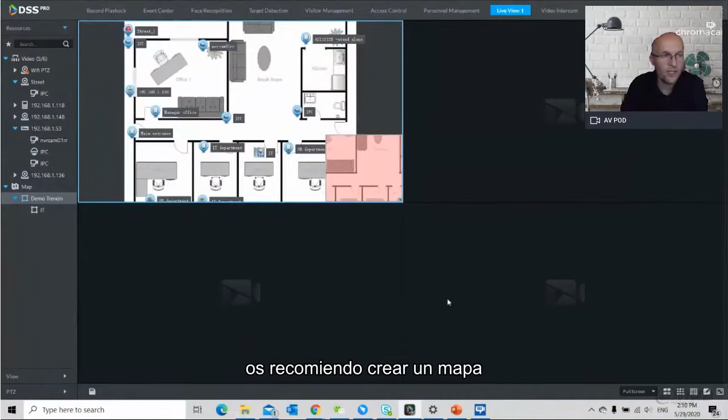So what we can do actually here, we can have maps on our live view. I really recommend creating a map for our partners, because this will really help a lot to the operators to see where the alarm is. In case one of the devices has an alarm, it starts being shown in red on the map, so for them it's really easy to localize where the problem is.

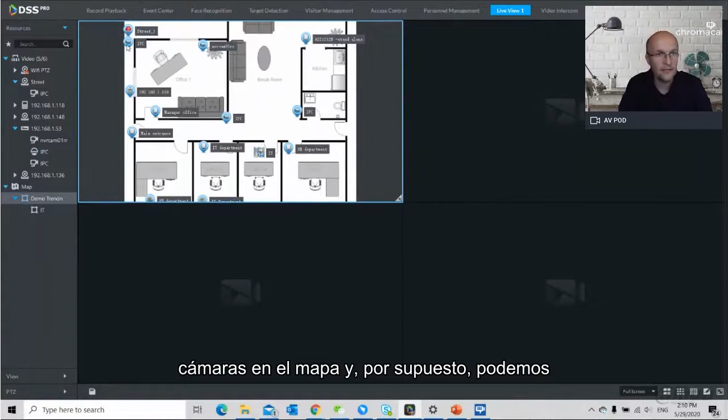Also, what we can place on the map - I was also asked today to do some comparison between our VMS and other VMSs on the market. We can place the cameras on the map, and of course we can have a live preview of the camera which is on the map. This is, for example, a street in Slovakia, in Trenčín. I live in the suburb - don't worry, we've got regular streets here.

What else can we place on the map? We can place the VTOs on the map, as you can see here. That's really nice because other vendors cannot do that - other vendors cannot put access control on the map. So I can open doors from the map, or I can lock them, or do any other things with the door. I can also place the VTH on the map, which is also really powerful.

So also the indoor units. And of course, we are offering cascading of the map. So in case we have a bigger project, we can place a map inside of the map, so kind of cascading over here.

You can click anytime inside of the map and see one camera, second camera. I didn't put the flooring for one room, but in real life, we would have also the floor plan over here.

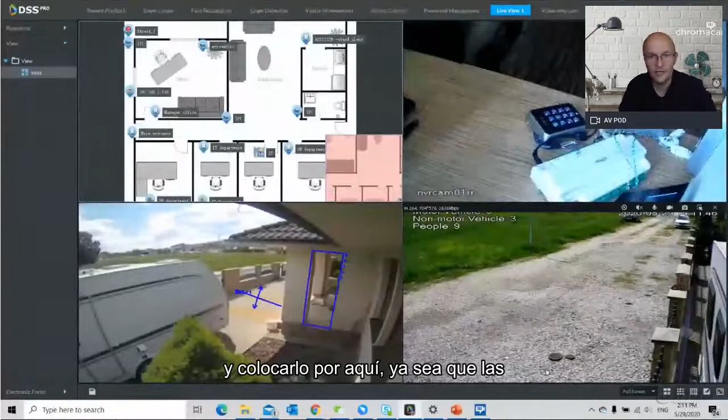In case the operator wants to work really fast, we offer saving the view. You can create any kind of view with your cameras and place it over here. Either the cameras are connected to NVR or connected somewhere else, it doesn't matter. You can do any combination, and also save the map on the view. So that's another advantage, that's the live view.

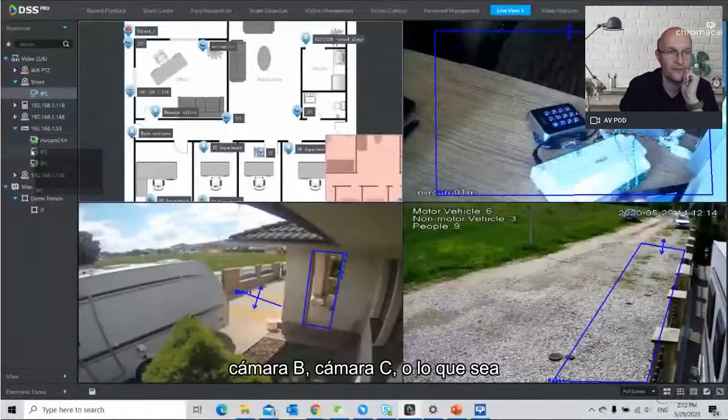In case the operators are new, I know how companies deal with cameras. If you come to a shopping center, you'll have first floor, camera A, camera B, camera C, or whatever letters. For a new operator, it's really complicated and hard to navigate. So what we add here as a new feature is a live preview.

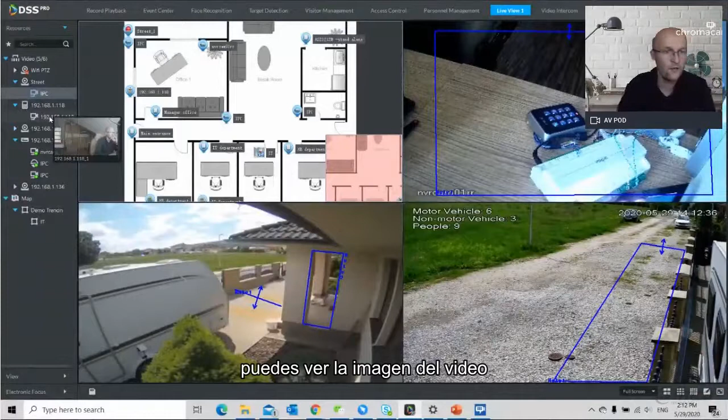As you can see, I'm going with the mouse over the camera, and I can see a live preview of that particular camera. I can also go over here on the VTO, and you can see the image from the VTO. So this is the new feature over here, really nice and very convenient for the operator.

What's also important for the operator is the alarms, the event center. So now I will pop up an alarm for you. Give me a second. I got one camera set up for a person without a mask, so I will create the alarm here.

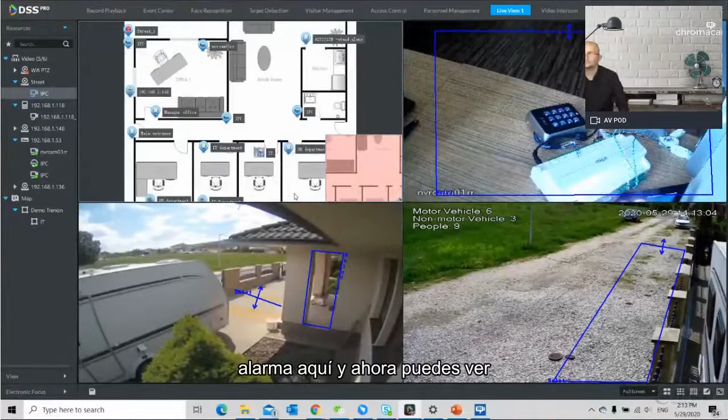Person type matches this trigger, and now you can see the alarm pop up. You can either go and do some investigation from this window, but what I recommend more is to use our event center, where we really made a lot of progress.

You can go to any of the alarms. They are nicely listed over here, by the time they arrived, with the alarm type name. For example, no mask alarm, and also some remark on what should be done, like ask the person to put the mask on. So you can give some instruction to the operator on what they should do.

Sometimes operators might not know what they should do. Now it's pretty clear, ask them to put the mask on. What else do I have in the event center? I got the live view over here, so we can go to the live view on the camera. Right now no one is standing, just me waving.

I can also see the snapshot from that event, when the person came without the mask into the office. I can go into recordings, so I can play the event. Okay, I see the man without the mask. And I can also go to the map.

That's why I really recommend asking our customer to please create the map. It will take them a few minutes, but for the operator this is really big help because they can quickly locate where the incident happened. Some other vendors don't have this at all, they have just snapshot and recording, not all these features.

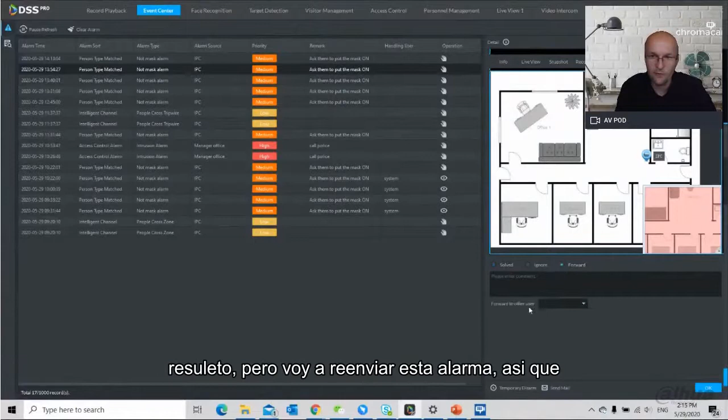Moreover, what I like is the escalation of the alarms. Let's say I got this alarm next to the kitchen, and next to the kitchen one of my colleagues is sitting. So I will not mark this as solved, but instead forward this alarm, saying please check on him, or whatever message you write over here. You can select the user from the drop-down menu and click OK.

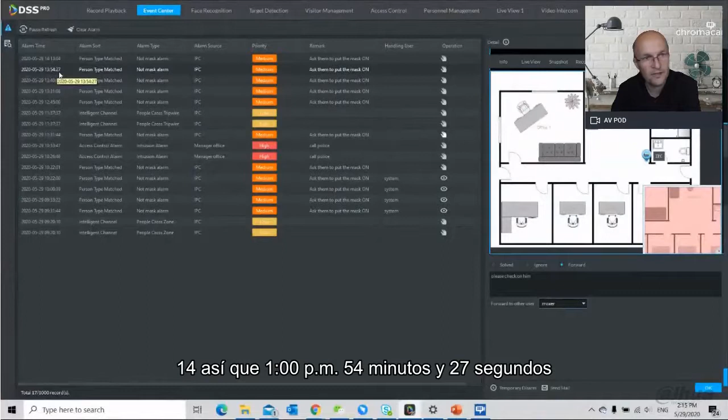Now you can see this alarm is at 1 p.m., 54 minutes and 27 seconds. This alarm will disappear from my list as operator. You see, this alarm is not here anymore, so for me this means it's solved, someone else has to handle this alarm.

If I just want to acknowledge the alarm, seeing there is a person without a mask in my office, I can do this right over here and hit acknowledge. You can see who was the handling user, it was system. So you can acknowledge the alarms over here. The alarms can have different priority colors, orange, yellow, and red.

So while creating the alarms, you can set up this priority. I also recommend this so the operator knows they need to solve these alarms as the first one.

Someone broke the door in the manager's office. What should I do? Call the police. So again, I know what to do.

In case the doors are broken, or someone just didn't close the door on purpose, and I'm getting those alarms, I can temporarily disarm. Let's say they are repairing the door, and I will ask them, okay, for how long will you repair the door? They will tell me 30 minutes. So I can just put 30 minutes and okay, and I will not get those alarms in the next 30 minutes. Everything directly from the operator view, and it's really nice and easy.

So really comparing to other platforms, that's something really, really nice.

Okay, I was talking about the live view and some live preview. Also in the playback, you can see on the bottom that wherever I go, I get the live preview from that time. So you see right now it's at night, right now it's at day. So I don't need to really click and move around the timeline in order to do some investigation. But also I can do some investigation.

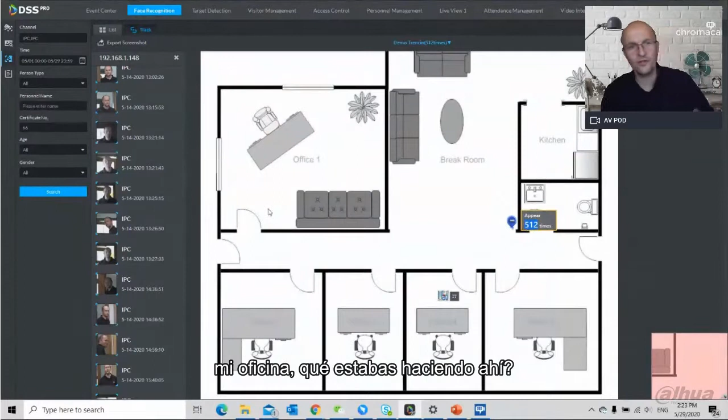You can go into the recording also from here. If you go all the way down, you can play the recording of how the person entered the office and so on. So it's not only about this — we've got pre-alarm time and so on, and everything I showed you before can be done also from this part.

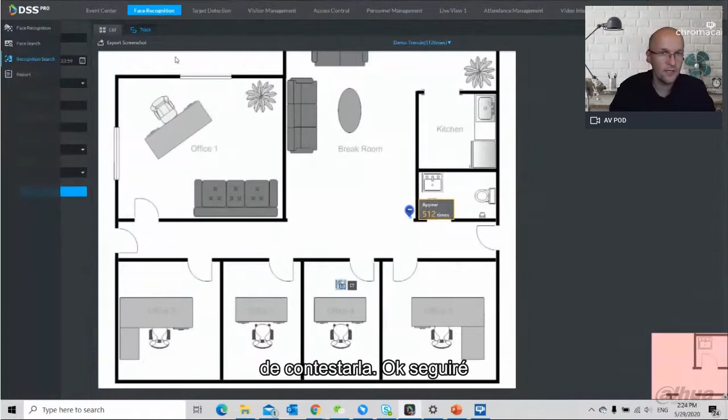Okay, I will continue with target detection. Everyone knows who is our main competitor, right? I don't like to call the names, but we all know. This is something they don't have — target detection. Our AI, our analytics are the best on the market. It was said also by IPVM, we are above average, together with one more vendor. So really, really, really nice.

So our analytics, what we can do, a lot. First of all, we can do special — you can see over here, a person is pixelated. I'm administrator, so what I can do is disable privacy masking.

That's what a lot of people were asking me for a long time. I'm an operator and I want to see, but my other operators shouldn't. If you have the 7000 series camera, you can enable and disable privacy masking if you are eligible, of course. So it's another feature where you can lock the project against the competitors. Moreover, for such target search, some other vendors require you to buy a license for 300 euros per camera, and you need AI cameras with the newest analytics and so on.

Over here, I can do much more for much less money. Enable, disable, really easy. You can also do this for export, so also in export you can enable or disable export with a privacy masking. On camera 7442, you need to enable privacy masking as a default.

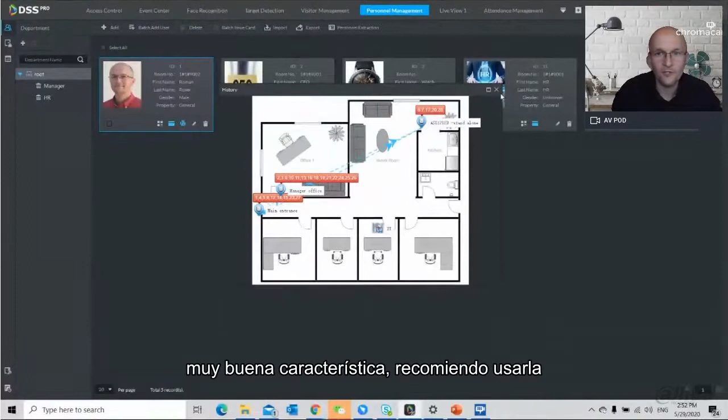You can put it on full screen to get a bigger overview. So the first time today I entered the main entrance, then I was going to the manager office, then again to the manager office, then to the main entrance, and then to the kitchen. So I drank a lot of coffee today, as I see. That's how you can see how the person was going around your building.

Also very nice, how you can do the import and export, it's actually the same thing. So I will do the export of the user again. Because of improving privacy in the latest generation, you need to input the username and password. I will put it over here. You can export with a picture - it will take a little bit longer and export in a zip file. If you choose without that, it will be in Excel file only. So I will put, I don't know, number 3, export done, open the Excel, and I can see all my users over here. If I choose with the face, I will have the name of the picture over here with .jpeg.

It's the same for importing. If you want to import users from some other system and you have their faces over there, you can import them. Over here, just put rr.jpeg. Make sure that they are located in the same folder as the XLS file, and just import them into DSS Pro. Make sure that the picture is not bigger than 75 kilobytes - it's written here in the requirements. Okay, so that's about importing and exporting users. Nothing really to talk about, it's really easy.

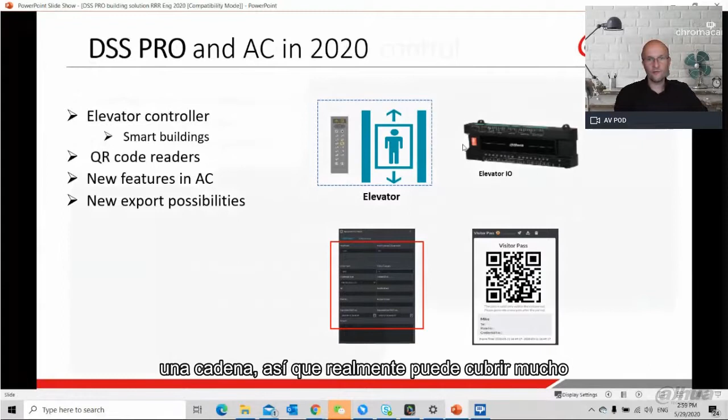Attendance control over here - it's part of DSS Pro again, it cannot be in DSS Express, it's an additional module. In DSS Pro we got this attendance module. It's a light attendance, not something really complicated, and I'm always telling everyone that this is meant to be the light attendance control.

We are also working on a special application for attendance control only, because we know that with the attendance controller, most of the time it's the HR department working with it, not the security office.

I got a question from Kevin: is the QR code function already realized by the current baseline DSS? Yes, everything I'm showing you at the moment is already out - no secrets, this is the regular version which you can download. It's version 7.002.0005, official release. Okay, let's go back to the topic.

So what can we do over here? We can do some free attendance - it's up to you what you are thinking of. Cancel modification, add a new one.

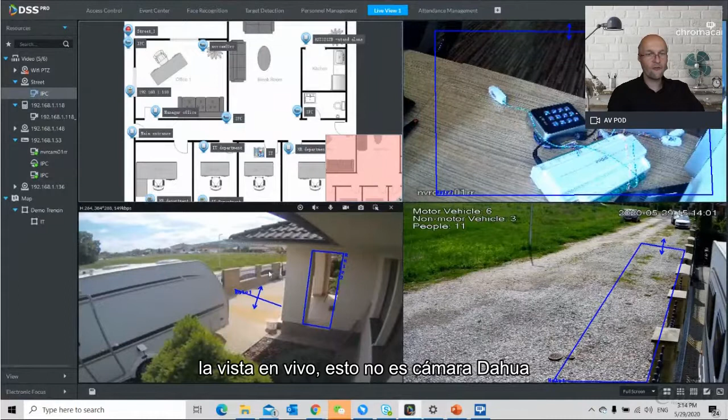If I go back to the live view, this is not our cameras, but I can get the alarms from this camera. I go over here. This is, you see, a third-party camera. You don't have the regular signs as we have usually on our cameras.

If I go to event center, and I want to see the snapshot, over here I got the snapshot of the man standing in my zone. If I want to play the recording, I connect more cameras in one alarm.

I got some pre-alarm time, and then I can see how the man is entering over here. I can do this on the bigger snapshot, but I can see how the man is actually entering my premises. So really, really nice tool over here.

So you can use it with or without our cameras, adding additional analytics for DSS Pro in order to get more from the system. So I really recommend you go out there and offer the solution.